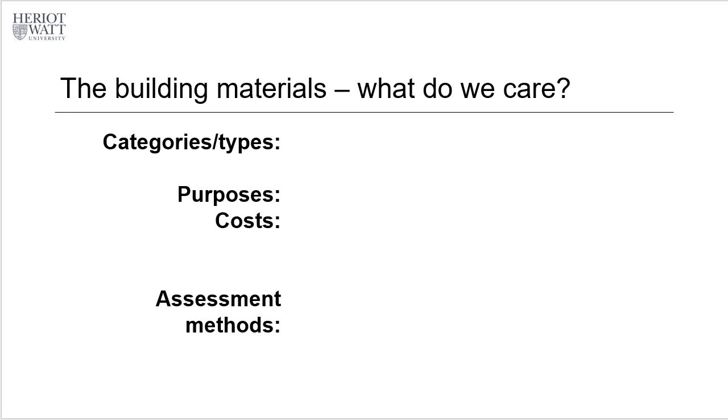When we consider the types of materials, we have raw materials, natural ones from natural resources like stones, timber. Obviously, those need a process. When you process those raw materials into something useful in the building, we use energy. For example, you need to transport those stones, timbers into construction site. And if you turn earth into bricks, you need to bake and use energy. So not to mention those metals, the process actually uses a huge amount of energy, turning those raw materials through a number of complicated processes to metal and then building elements to be used directly into buildings.

So the types. When we consider using the types, we have different considerations, and the considerations very often relate to our profession. For example, here I list 3. Structural - if you are a structural engineer, obviously durability, strength will be the major concern of using different materials.

Now, if you are an architect, then their looks, the texture, color can be the major concern. For building service engineers, then obviously we care about the thermal, sound, energy consumption for heating and cooling and so on. So we have different focus because of our own profession.

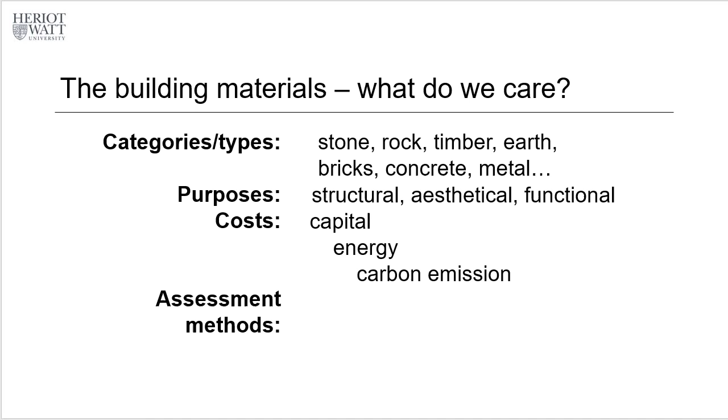Although we know the purpose of using materials, and although we know the costs to be calculated, then how do we judge? How do we make compromise between the disciplines, between the needs of those competitive requirements? We need some assessment methods, and that will be our topic today.

So do we judge purely by the use of labor, use of natural resources, or by energy, or by emission, or how much pollution is created, and many others? Do we have some kind of systematic, logical way to give us a guide to make assessment? Just like buying a mobile phone,

what makes us make a decision? The cost, the function, the design style, the budget, and so on. We certainly have a way to make a rational decision that convinces us we made a good decision.

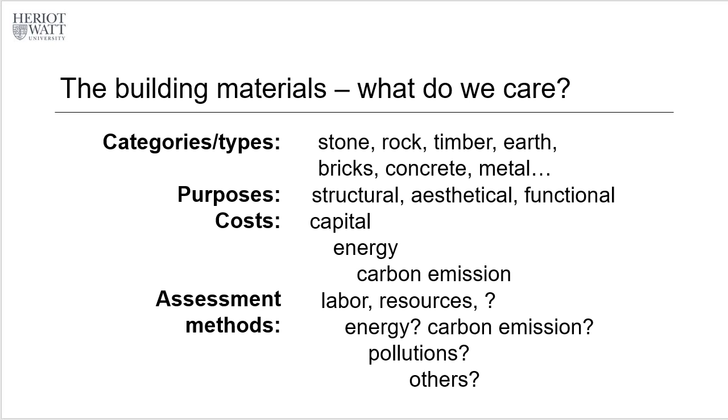The aim of this talk is, number one, to raise the awareness of the association between construction materials. We know these materials, and we want to know how those materials relate to carbon emission. That is the first one, because carbon emission is a major concern in society, and construction materials is one of the major issues in building audit. So that is part of this course. That's why we introduce carbon emission as a new element to this course.

Second one is we want to understand the major impact of using different materials. That is carbon emission. There are a number of different environmental impacts, but carbon emission is probably the most complex one. And on the other hand, it's quite easy to calculate and quantify.

Third one is we want to introduce a basic concept about life cycle assessment for a building or a piece of building material. Obviously, we only talk about the fundamentals. It's kind of the time scale, the duration we make a judgment, like buying a mobile phone again. If you buy a mobile phone for 3 years of use, then the initial investment divided by 3 years.

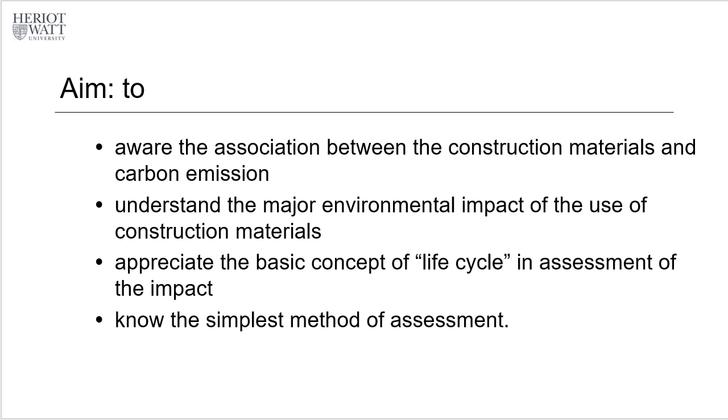Every year, you just use a small amount of money. If you use it for just 1 year, then that cost becomes more expensive. So you can see the duration is one of the major elements making assessment. We need to know this. The final one is that the simplest method for assessment is a quick estimation, basically.

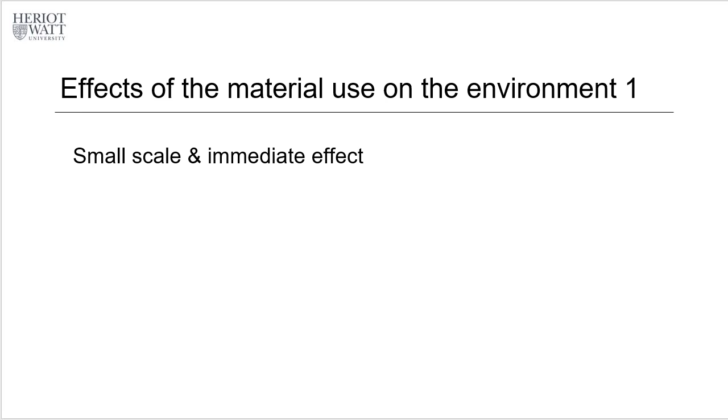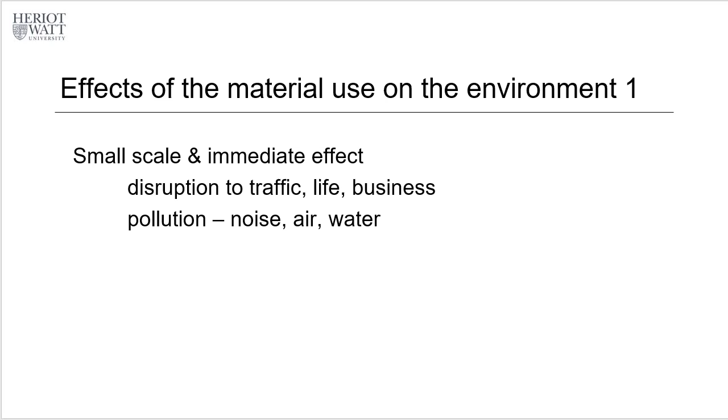Let's look at the effect of using materials on the environment. We start from what we're familiar with, the small scale. If we pass a construction site or a road construction, we know there's some impact: disruption to noise, to traffic, to life, to normal business, and to the environment—pollution, noise pollution, air pollution, water pollution, and so on. These are quite obvious, and we know it happens to our daily life.

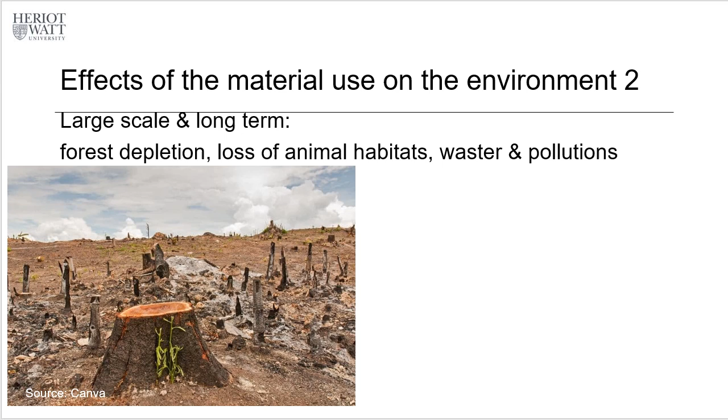Then how about large scale? We mentioned earlier, timber is the major raw material for construction. Large use of construction and large scale construction projects leads to deforestation, depletion. And if the forests change, then obviously those animals will move away, so loss of animal habitat. Now, processing those materials into useful building materials causes cost of waste and pollution and so on. So excavation of raw materials definitely has an impact on local ecosystems, and therefore you need to balance the needs and the impact well to make this kind of development sustainable.

Finally, when a building finishes its life cycle, demolition will produce a large amount of building waste. How do you recycle them? How do you deposit them? That's another major impact on the environment.

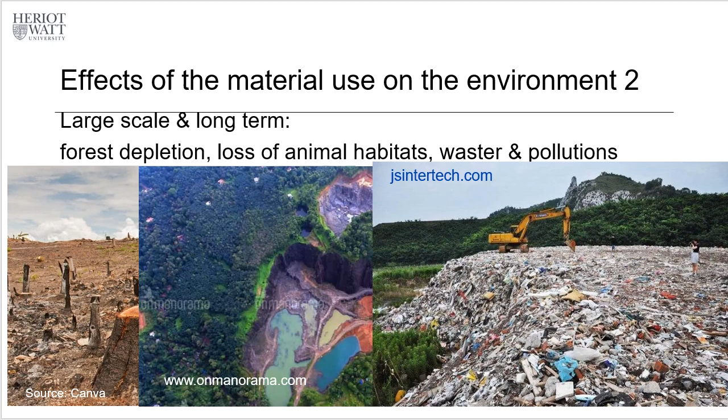I mentioned earlier the concept of life cycle, the duration—3 years as the lifetime of a mobile phone. If you use it longer, the cost becomes smaller. For a building, we consider from the raw material excavated from natural resources, treat it, transport it into some products, then move to the site, make it into a building, and the building operates to provide for occupants over several years. Then at end of life, it's knocked down, demolished, material recycled, waste dumped, and so on. That completes the entire cycle.

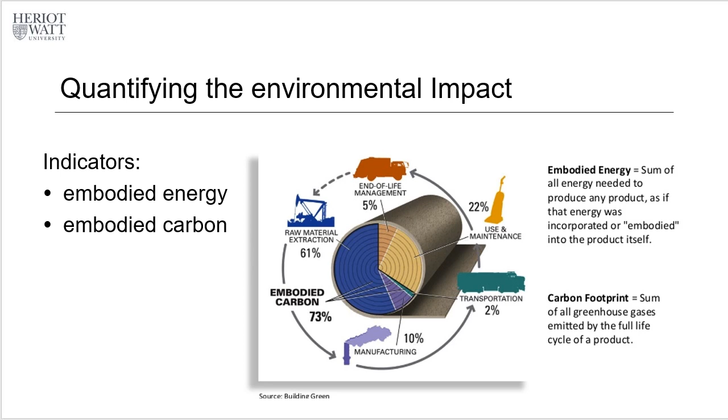Throughout the entire cycle, there are stages, and each stage has process steps that involve energy consumption. For example, excavation—the machinery needs fuel to operate. Transportation—vehicles burn fuel to move building materials. Construction—cranes, lifts, all use energy. Knocking down with explosives and so on again uses energy. And when you burn fuels to turn them into useful power, there is carbon emission. So there is always an energy connection with carbon, until you find a renewable way to generate energy. We can see energy is used in excavation, manufacturing, transportation, processing, and demolition. That is what energy consumes for.

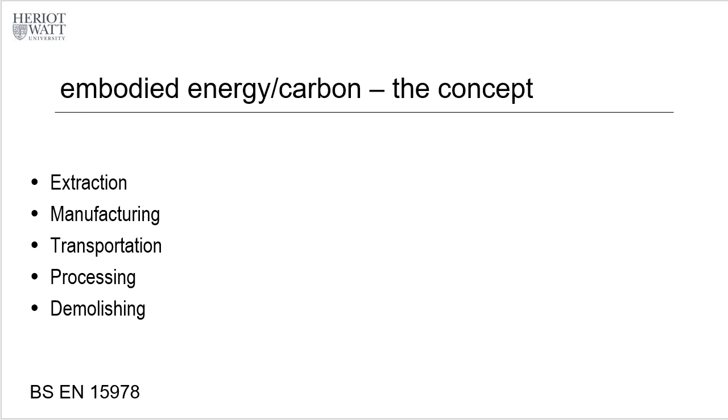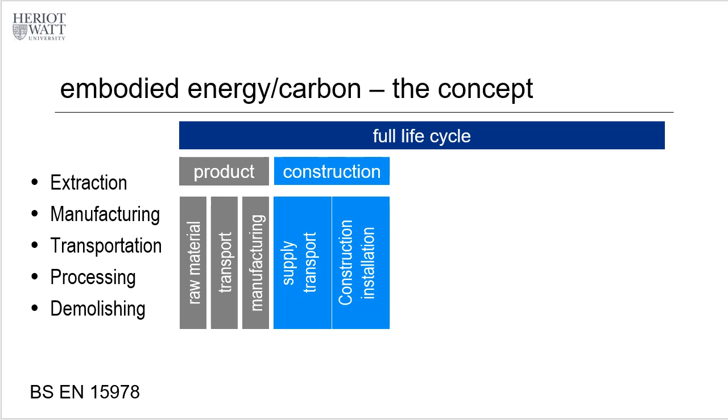Now, if we look at the entire life cycle, we can divide it into 4 stages. The first is producing building materials—from excavating raw materials on site, through transportation, turning it into products via manufacturing, then bringing it to the construction site through supply transportation and making it into a building, so we have a final building as a product the user can move into.

Then there's normal operation—providing lighting, heating, ventilation, heating and cooling, and so on, plus transportation like lifts inside. All these facilities and services need maintenance, and there's another cost—repair, replacement, refurbishment—again, all using energy.

Finally, when a building finishes use, we knock it down to recycle the recyclable materials and dump those we don't need, or treat them to make them easier for nature to digest. So all this again uses energy. We call this embodied energy—when making the material, bringing it into a building, and then after use, knocking down, recycling, depositing, and so on. The entire thing we call embodied energy. That is a cost—a cost beyond the capital cost.

We call this from cradle to gate, and to grave. If you consider the embodied energy from the raw material into a building, that part we call from cradle to gate. If you add the other end of life, the grave, we call the entire duration the full life cycle—from cradle to grave.

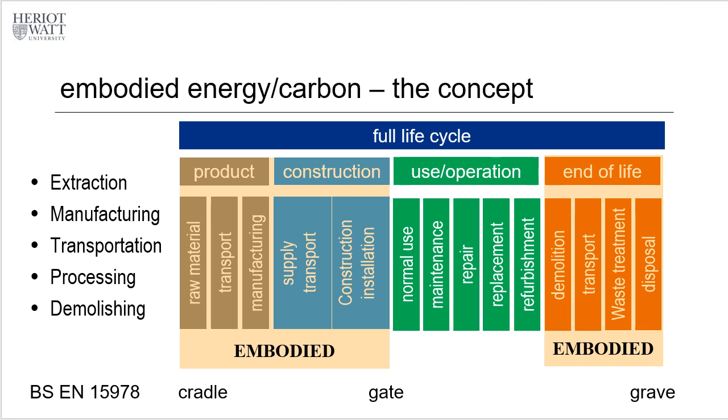So that's an analogy. Here are some examples - different materials use different embodied carbon. Embodied energy and embodied carbon are all related to the building, from making the material into the building and then demolishing and recycling it. The two parts summed together is called embodied energy - the energy used to make this one process complete.

That energy is produced, for example, by burning fossil fuels. So there's an association, a conversion rate from the energy needed to producing that energy, which produces some carbon emission. Different countries have different conversion rates. If that energy is produced by renewables, then the conversion will be zero, so the carbon will be zero. So they are different units - they are not the same.

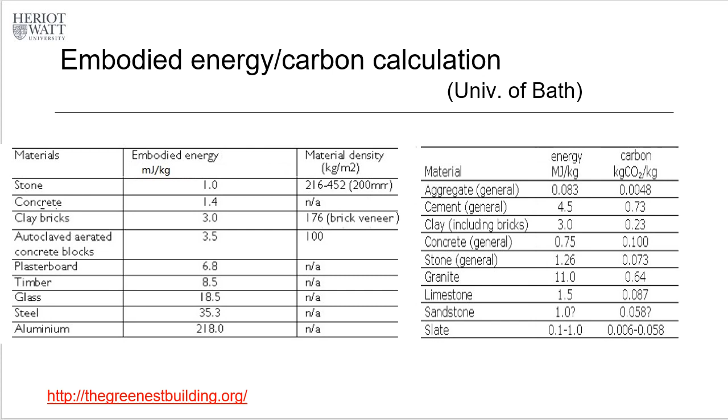This is an example. We have different materials in the first column, and they have measurable densities. If you give the thickness of a building element, you get a surface area - very often we consider floor areas. If the floor slab is 12 millimeters, multiply by the surface area to get the entire volume, then multiply by the density to get the weight of the material.

If you look at glass, it actually needs huge heat to turn it transparent or give it some colors, so there's very intensive energy inside. However, that material is recyclable. Anyway, glass has a higher embodied energy in it.

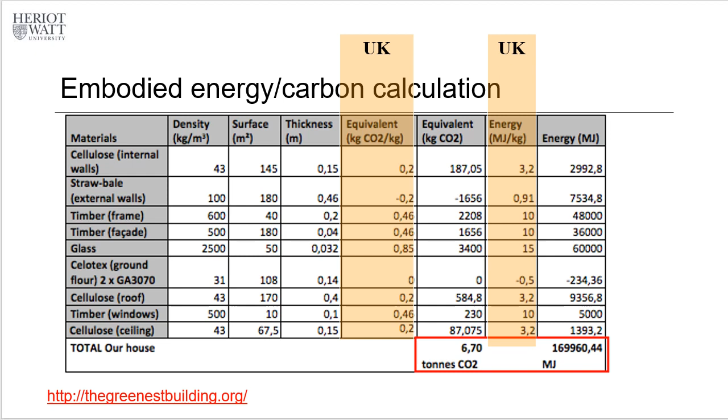So we have covered what we use to assess the use of materials. We consider the impact to the environment, and to make the assessment we use indicators - embodied energy and embodied carbon. The time scale is the full life cycle.

Let's look at a few examples of demolition, the final stage when a building finishes service. At end of life, we have a number of reasons to demolish a building. The land can be used for other buildings, so we need to reclaim it. Or before the building reaches end of life, we find some structural fault and it's not safe to continue using it. Or we find the function of the building doesn't meet the needs of modern times, so we knock it down. Or the building is damaged by natural disaster like earthquake or typhoon.

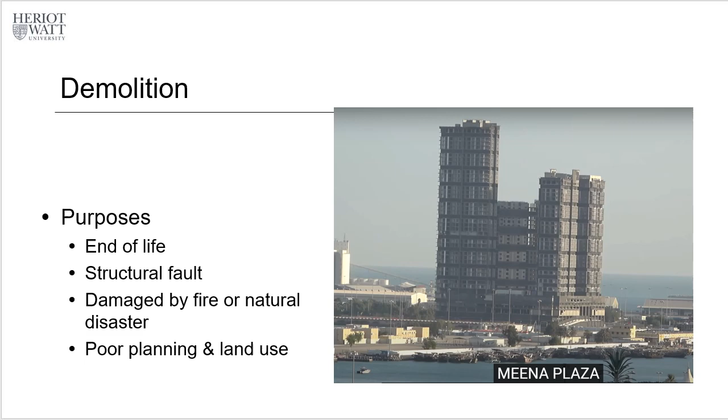The pitiest reason is poor planning. Initially you thought it would be a good idea to build a high-rise building, and after a few years, or when a new policy comes in, you find that it doesn't meet the new need, so you have to knock it down. That is poor decision making in planning. We have seen a lot of this kind of poor human error causing huge environmental cost because of demolition. Let me give you some examples.

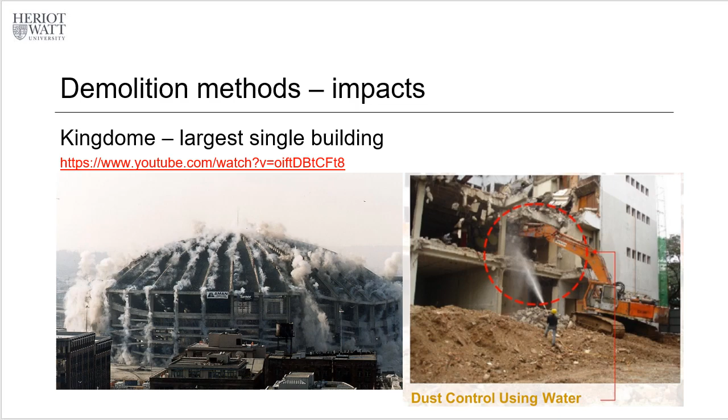These are a few old buildings that finished their service and then were knocked down, demolished for some other use. And this is poor planning.

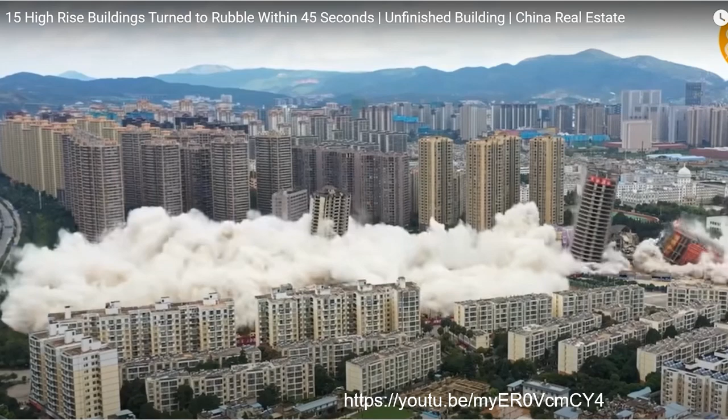So now that raises another question: why do we recycle? Obviously, recycling is to lower the project cost to some extent, using less expensive material if we use recycled materials. But the major reason is environmental consideration. We can reduce the environmental burden by producing less trash, and we also can reduce embodied energy. Recycling always uses much less energy.

If we use glass as an example, producing glass from raw material has high embodied energy, but recycled glass has very low embodied carbon, similar to aluminum. Aluminum is very low energy for recycling, and overall it reduces the environmental impact.

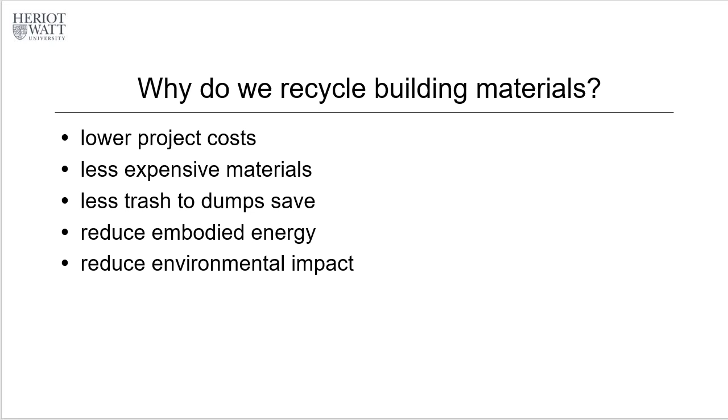What kind of materials can be recycled? Here are some listed ones. Timber, we are all very familiar with - if you go to IKEA, you'll find that many of those kinds of furniture use recycled timber. Steel, cast iron, aluminum, as said before, are all recyclable. And if you build a building for a short life cycle, then that would be the ideal material to use.

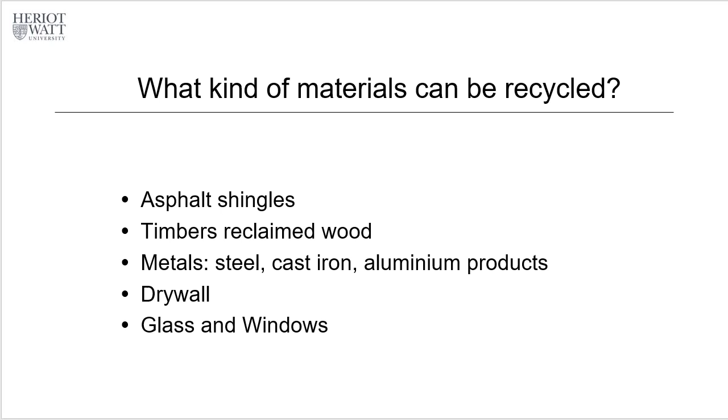If you go to Haymarket, you see they are constructing a few new buildings, and very obvious is their steel structure, the frame, because they can recycle it after the end of the life of those buildings.

Here are some examples using different recycled materials. The photo on the left is actually straw bales. A farmhouse uses local harvested straw processed into big blocks with a timber frame to support the structure. The bales provide good insulation for temperature, so it's very energy efficient when built this way.

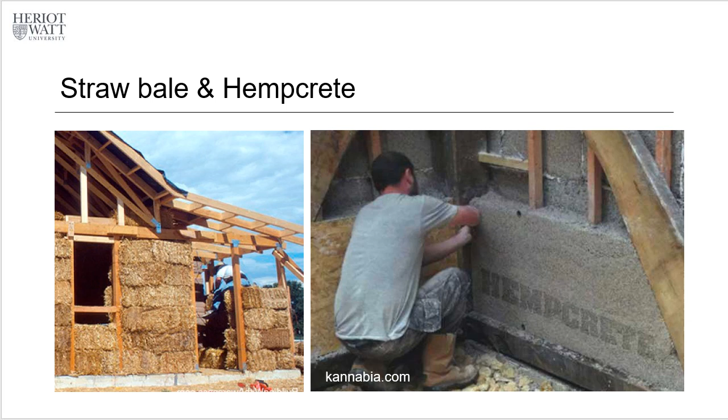The photo on the right is actually hempcrete - using straw mixed with concrete to make much stronger, durable, and fire resistant partitions for a wall. But it still doesn't support too much load, so you still need a structural skeleton to support the building.

Asphalt can be made into tiles for roofs, and reclaimed wood can be mixed with some chemicals to strengthen it - it's a very, very good way to recycle.

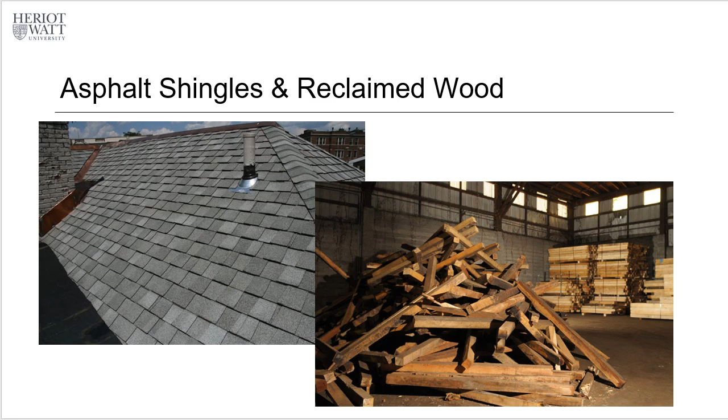Now, we are very proud that in our own university, Professor Medero developed a way to recycle waste into very attractive, high quality bricks. They even come out in different colors, making them very welcome by artists, and clients also like this because of the low environmental impact and use of waste to reduce the environmental burden. So for socially responsible organizations, this can be a very good way to show their public image.

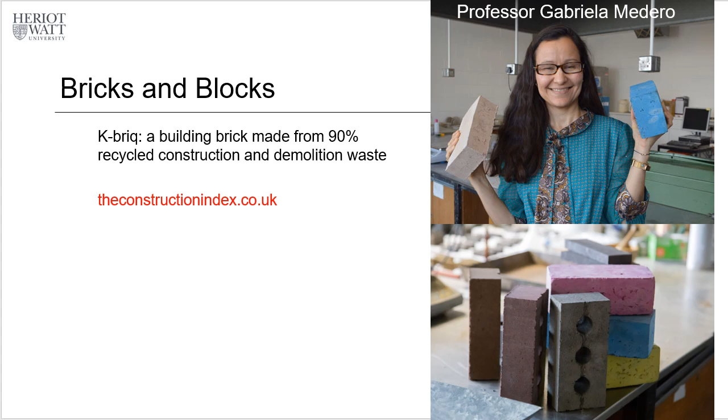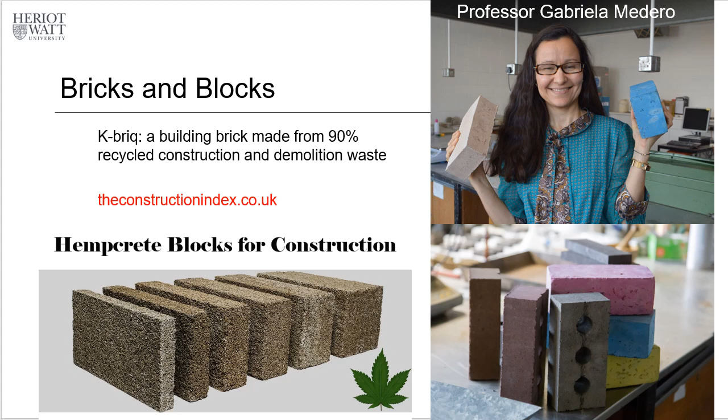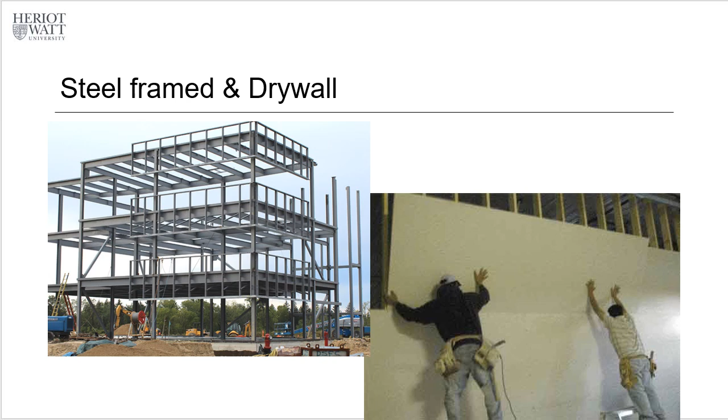Hempcrete blocks, as I said earlier - we have on-site poured concrete, and we can also have prefabricated blocks, so there are a wide range of different uses. Steel structures, as I said earlier, are very popular. You can see almost all new buildings, whether public buildings like schools, hotels, office buildings, or even residential buildings, are built with light steel structures. Glass and aluminum are all very good materials to recycle.

To conclude today, what we want you to remember is that when we make decisions about using different materials, we have an environmental concern. How do we consider whether a solution is environmentally friendly? We consider one or two indicators: embodied energy or embodied carbon, calculated over the entire life cycle, from cradle to gate and then to grave. And we have a number of ways to calculate this. That is what I would like you to take away.

And when you consider the renovation of the library based on your audit, if you want to improve something in the new refurbishment, when you consider the use of materials, you have something to rely on to persuade other people that your solution is environmentally friendly, that it's sustainable. That is what we want.